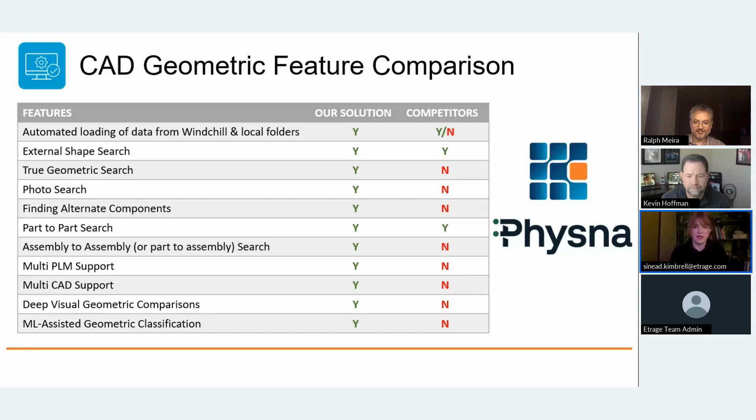One thing I do want to point out that I think differentiates us in the PTC space is that first line you see, automated loading of data from Windchill and local folders. As a PTC partner for over 20 years, ETRAGE is uniquely positioned to help companies who are currently using or planning to use Windchill. So ETRAGE Publisher automatically loads data from Windchill and local folders. If you had CAD data living outside of Windchill, we can take that and automatically publish it into Physna for you.

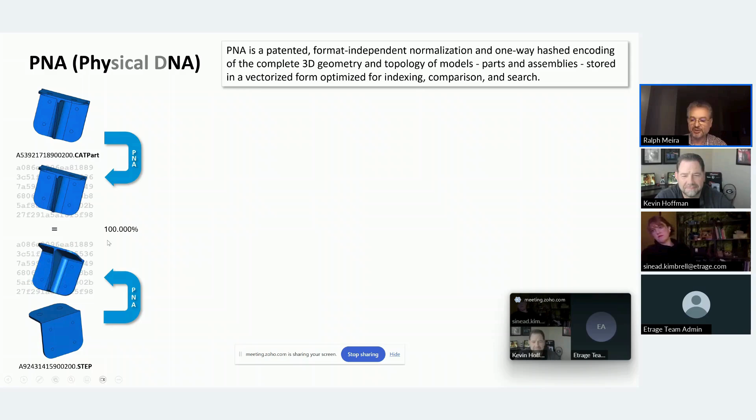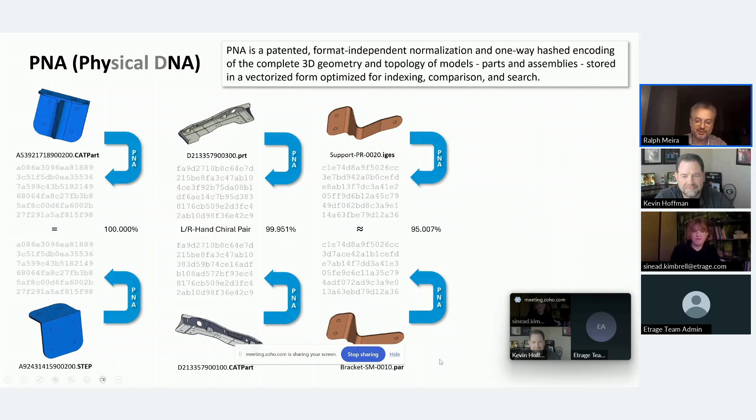And Physna is a deterministic algorithm. It's using geometry, not AI, so it doesn't hallucinate. It repeats every time the same answer. We do use AI to enhance our query capabilities, but the core algorithm is actually pure math.

So now here you have an example of an assembly where the physical DNA is a little bit longer because there's more geometry to describe. And here's an example of a subcomponent of that assembly, and it has its own physical DNA that is embedded in the physical DNA of the larger object.

I like to show these slides to begin with, because when I demonstrate what Physna can do, it looks a little bit like magic. And so it's really good to ground yourself, come back to, okay, it's just a bunch of strings of data that now I can search using precise searches, like in the case of finding this object in this assembly, or very similar strings that lead to very similar parts. We've literally codified the 3D world into a string of vectors that is a very powerful concept.

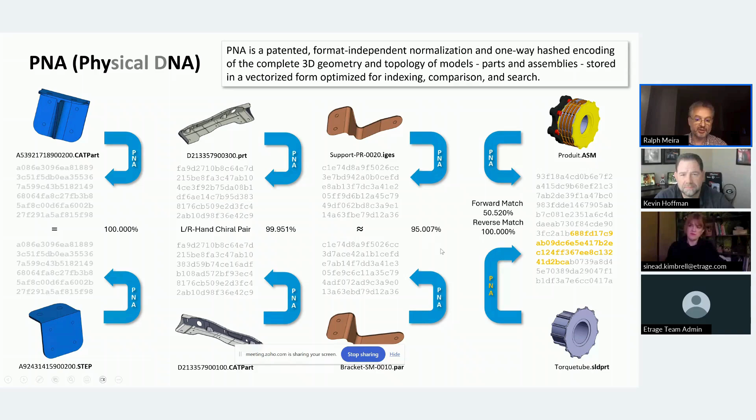And so the best way to understand it is to see it in action. So I'm actually going to switch over here to Physna and show you what it looks like through its web UI.

So Physna runs on cloud platforms. It's containerized so that it can be deployed easily in all sorts of environments. We do, for example, do business with the US Air Force, and so we've gone through the whole part of having DoD Impact Level 5's capacity that meets FedRAMP High standards. So from the security perspective, I think we're well covered.

But from the simple, how do I access? It's just a browser. You don't need a plugin. There are no special CAD licenses. And yet you're able to manipulate 3D data using folders and subfolders, and then be able to literally point and click and see 3D objects and manipulate them in any way you need. So as every other search engine should have, we are able to search in 3D.

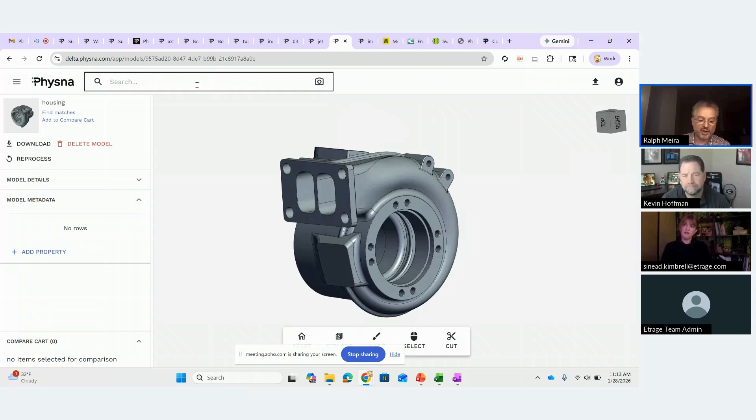So if you type something like a keyword that hits elements of metadata, you see here, I'm looking for seats, and I'm finding seats. This database—I'll talk a little later about where the data is coming from. What I just did there is called a 1D search. I typed a word and it found it in the metadata.

If I click over here on the little camera icon, if I'm using a mobile device, it's going to use its camera. In this case, I'm using a PC, so I'm going to load a folder full of pictures, and I'm going to use this retaining ring. So I just gave Physna an image of an object. I'm not too sure what it is. I can give it multiple images if you do have them.

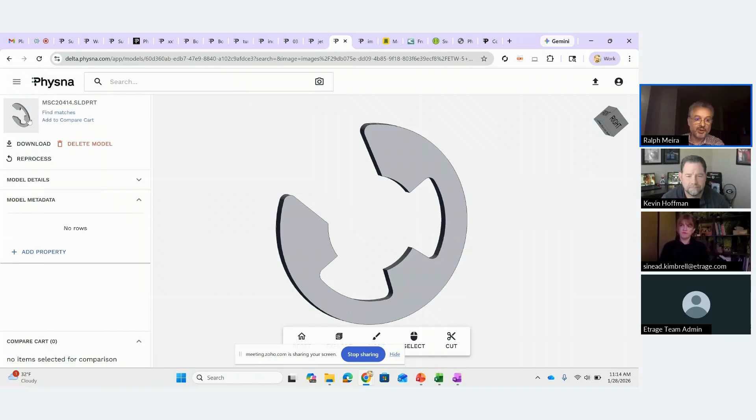But look how quickly Physna was able to look through its database and its 3D geometry and render all the objects it has until it found the one that matches exactly the picture. So now I know this is an MSC 20414. And if I use that to search, Physna comes back and tells me it's 100% sure that this assembly and this retaining ring go together.

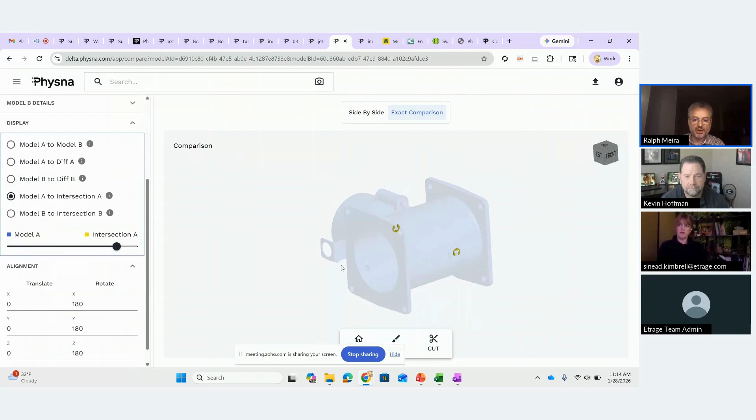So I'm going to ask it to compare, and I want an exact comparison of where they intersect. Let's change the opacity of the larger object. And there, in a matter of seconds, I went from picking up something on the ground, figuring out what it is through a picture, and now I know where it came from. This is a live system, so you're seeing the performance of the system as it really exists.

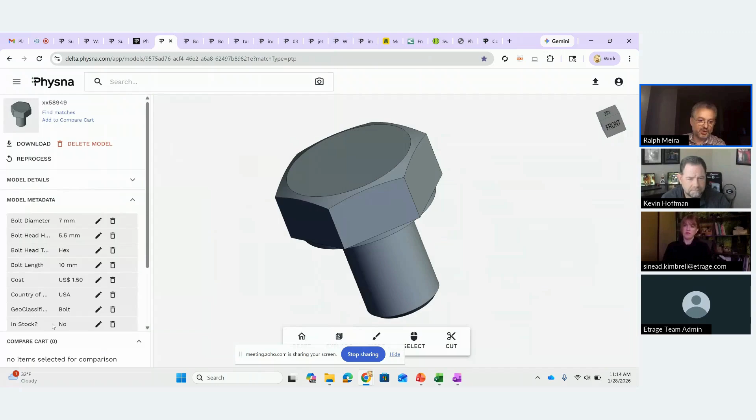So how can this be used? Take, for example, you're looking for a bolt. This is a classical case across all industries, and the bolt is not in stock. So all you have to do is search using Physna, and it will tell you, I found several possible matches. The top one is a 100% geometric match.

And now I apply all the metadata to make sure it is exactly what I need. So this one is made out of steel, it is in stock, and I seem to have it in—Grainger has it, at $2.50. So there, in a matter of seconds, I went from having a problem with obsolescence, an object I can't find in my inventory, to finding your supplier with a 100% match.

Now this example here, a 96% match. This is where it really gets interesting. You would never think of comparing the XX58949 bolt to the bolt named in French. And yet Physna does do it, because mathematically, geometrically, they're very similar.

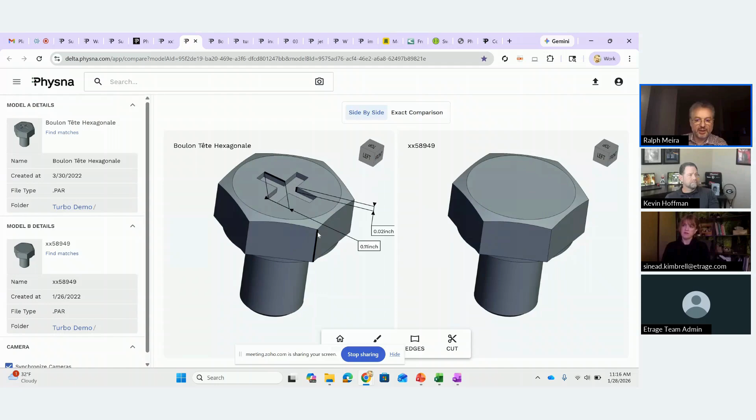And I can put them side by side and let Physna show me through its tools what's the depth over here. Let's see—over here I can measure this Phillips kind of symbol. This gives me a good idea that they seem to be very much the same. I mean, the 96% already speaks lots.

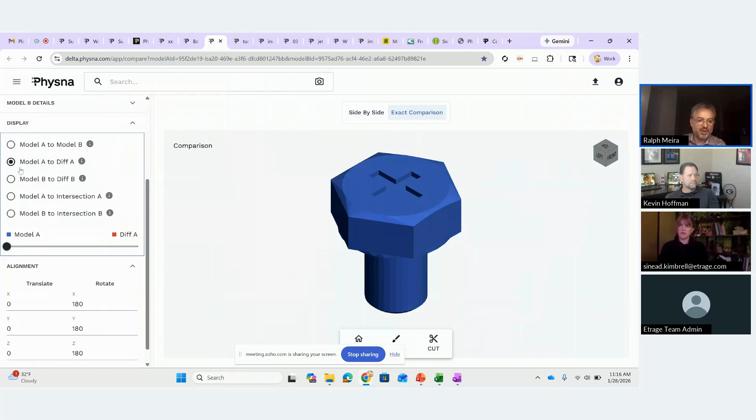But look how more interestingly, I can ask Physna, show me exactly where these two bolts are different. And Physna highlights—it's really just at the top. So going back to the search, this object is a potential substitute for this one if that little plus symbol on the top is not relevant functionally. And that's the power of Physna: the ability to find not just identical but similar parts and candidates for simplification.

Let's say I have both of these in inventory. Perhaps I don't need to keep both of them. And the savings can be quite substantial.

Now, when I queried using that bolt, Physna also went ahead and searched for locations where the bolt fits. So it would be a part-within-a-part kind of search. And here we have the turbocharger, 100% guaranteed to host the bolt. So let's take a look at that.

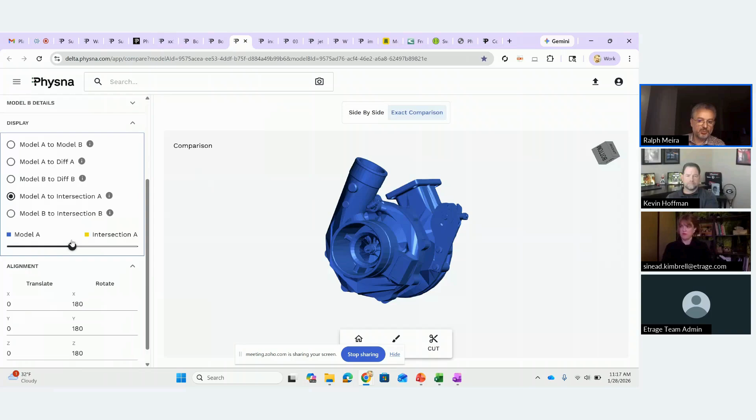Let's intersect the turbocharger with the bolt, and there we get a multi-match. So I need 8 bolts to service the turbocharger. The fact that I don't have the bolts means I've got an 8x problem. And it's as simple as point and click.

So you don't need to know a lot about CAD systems, you don't need to know a lot about geometry—the system is quite intuitive. And again, if you search using an assembly, not just a part, that's not an issue. Over here, I'm searching using the subcomponent of the turbocharger, and it says the next level higher up is the turbocharger itself. I'll show you the full workflow.

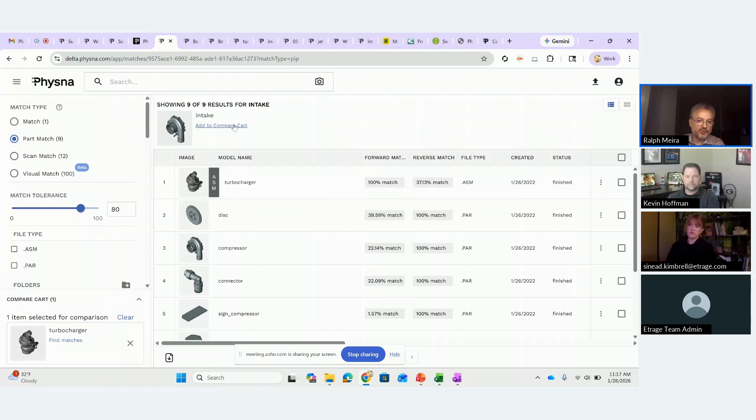If I put the two together and compare them, I want an exact comparison of where they intersect. I should see that intake valve and the turbocharger put together, and there it is. Again, if I want to see just the original part there, that really helps me see where it fits in the world.

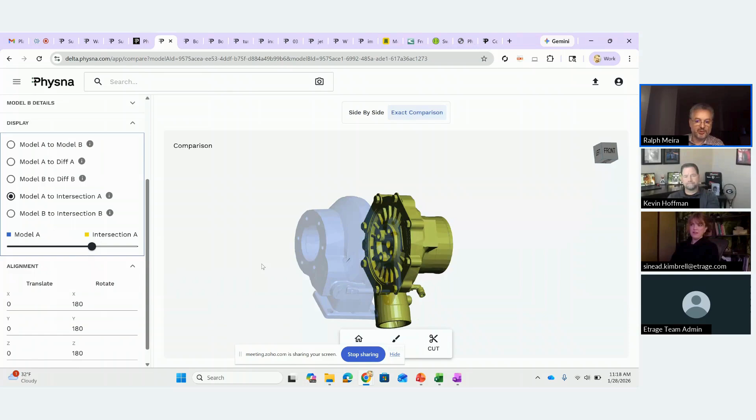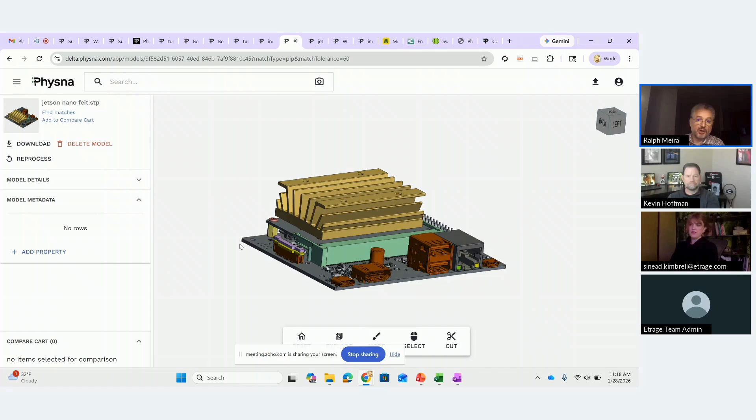If you're dealing with an electronic component like a capacitor, where all the properties are extremely important, you can use Physna because it will match that capacitor across all the circuits in its database. In this case, Physna matched that capacitor and found it here. Or I can just ask Physna, show me where - and it turns out there are 2 capacitors.

If I'm dealing with this whole circuit, navigating in a 3-dimensional way, I'm interested in seeing what else I have in my inventory that can be used to assemble this circuit. It's just a search, and Physna comes back and tells me all the other similar circuits, but also the subcomponents. Look how interesting - let's say I'm looking for this chip.

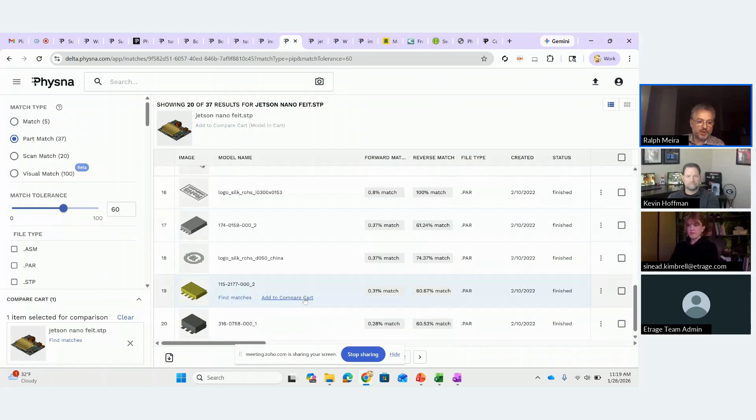I can add the circuit and the chip together, compare the two, and ask Physna to show me exactly where they intersect. You can see it's the same workflow. That little chip I would probably not see from the outside, but Physna sees the inside and the outside, so there's the chip - that's where it's positioned inside the circuit.

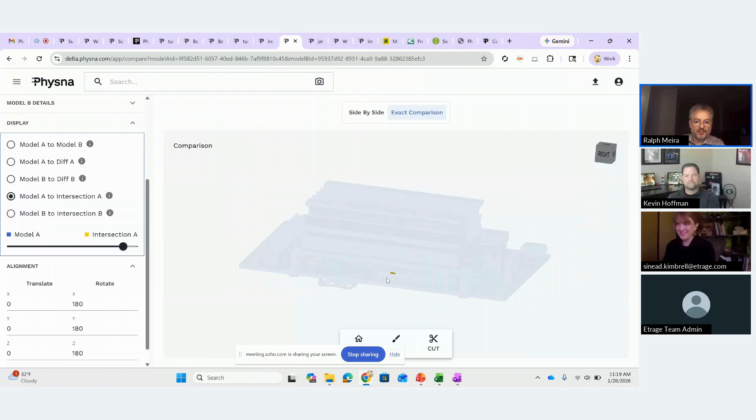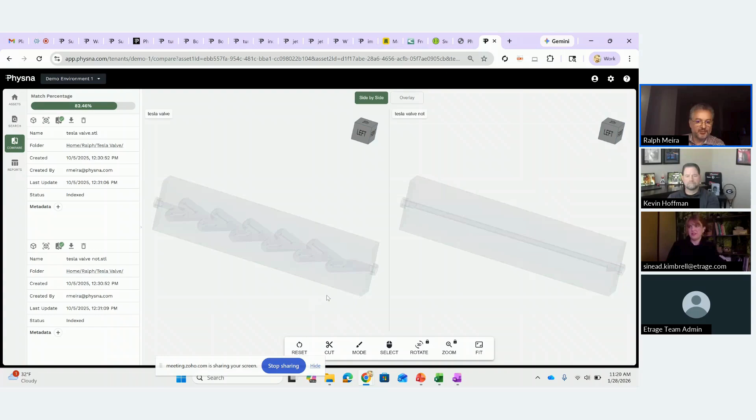I mentioned we operate on CAD files, multiple different formats. The formats extend from Dassault, from PTC, from Siemens, open standards - SolidWorks, Solid Edge, Autodesk, that's not a problem. We can literally see across all those formats because we use a standard physical DNA as the comparison tool.

So where does all this data come from? It comes from product lifecycle management solutions, and it also comes from the market. If you look at McMaster-Carr and take any one of their objects, you'll see it's available in several 3D formats, including product detail. And they make it really easy - I'm not even logged in, and I can access all this information because it speeds up sales.

That's why the vendors are making it possible and easy for you to access 3D data. We partner with these companies to access their data and make it available to you as well. Here's another example, TraceParts, with over 170 million objects from over 2,000 vendors in 3D. So when you're searching, you can search within your own library, or we can help you extend and search across different libraries.

Now, if you say, well, I deal with very old equipment and sometimes I don't have access to CAD - well, if you can scan the object, using a LiDAR scanner or photogrammetry, then I can use that as a search criteria as well. And Physna comes back here and shows me multiple matches and even CAD files that correspond to that scan.

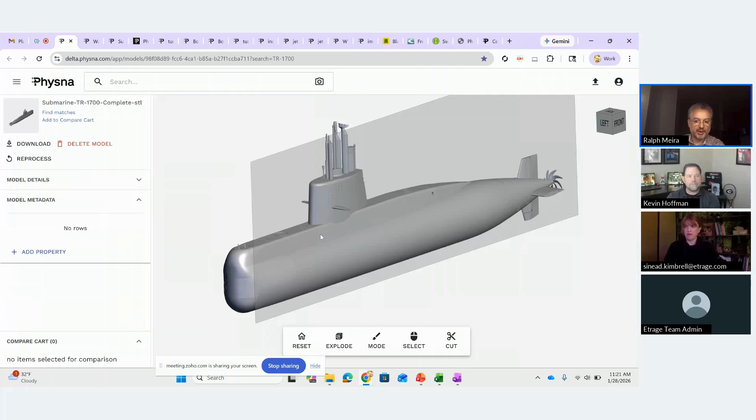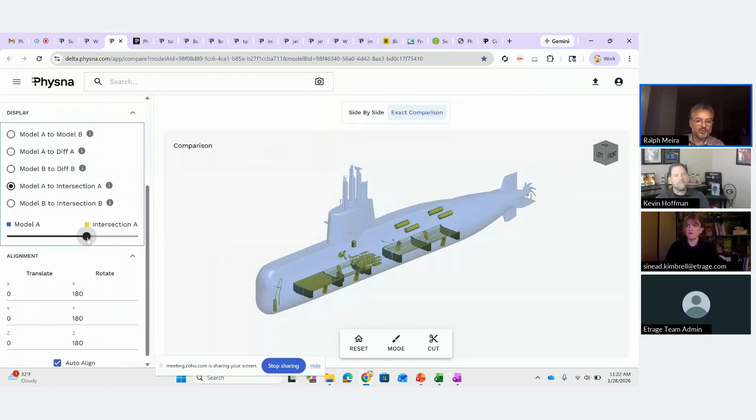So what I'm showing you at scale means the following. If you take a complex system like a submarine or an airplane, and a warehouse or a simulated digital twin of a warehouse of all the things you purchase or plan to purchase, you can ask: what are the things in the warehouse that can be used to service the submarine? The answer is just an intersection of the two. Geometry doesn't lie. So here you have all the elements in the warehouse and in the submarine, independent of labels - it can have as-manufactured, as-stocked, as-purchased numbers. That doesn't matter. We're just looking at the geometry to match exactly what you need to see.

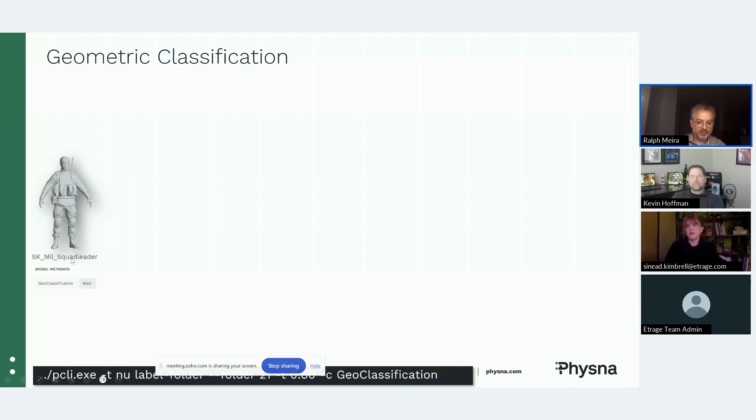Let me go back to slides and show you one more example of how Physna can be used. We did this with NVIDIA a few months ago. They have this environment called the Omniverse, where they do a lot of 3D simulation. They have these objects - I picked one of them, labeled it as a man, and gave Physna a command line interface command saying that if you find anything within an 80% threshold, go ahead and label it the same way. So this is what it did, and then recursively, this is what it produced. As you can see, using geometry, I can organize and classify my inventory very quickly and efficiently.

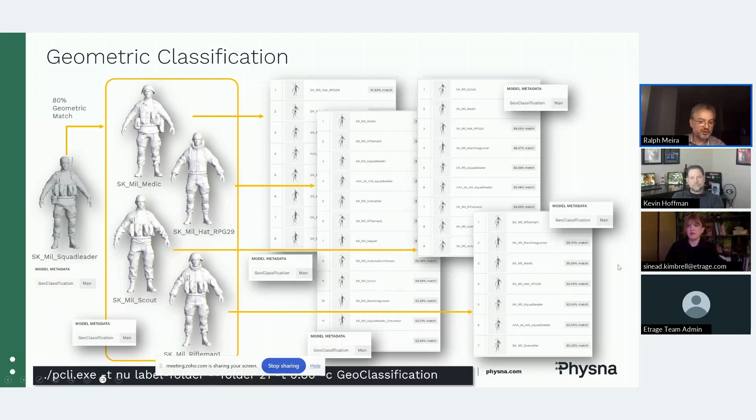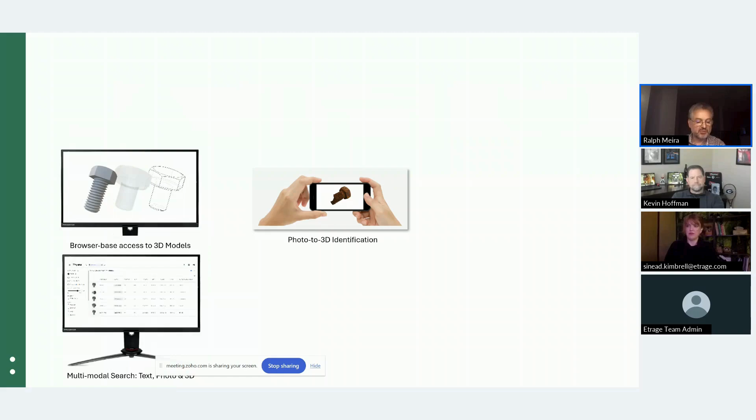So let's take a step back. I showed you that I can search using text, when I typed in the word seat, or image, when I had the retaining ring. When I perform these searches, I find 3D objects and data about those 3D objects, like where it fits in the world. That's one type of search. I can use that to classify, organize, and assess my inventory levels.

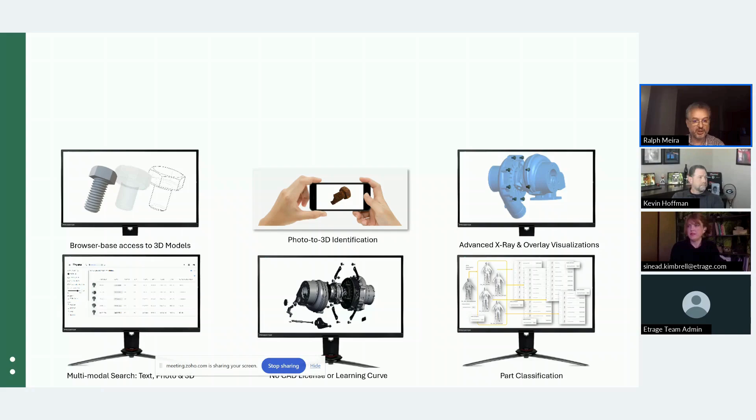I've got advanced visualization, and yet the learning curve is not steep. CAD systems are notoriously hard to use, as hopefully you've seen through this demonstration. Physna is not. I can see across different file formats, so that enables mergers and acquisitions analysis—do they purchase the same things I purchase? I can perform analysis at scale, as I've tried to show you with the submarine and the warehouse example.

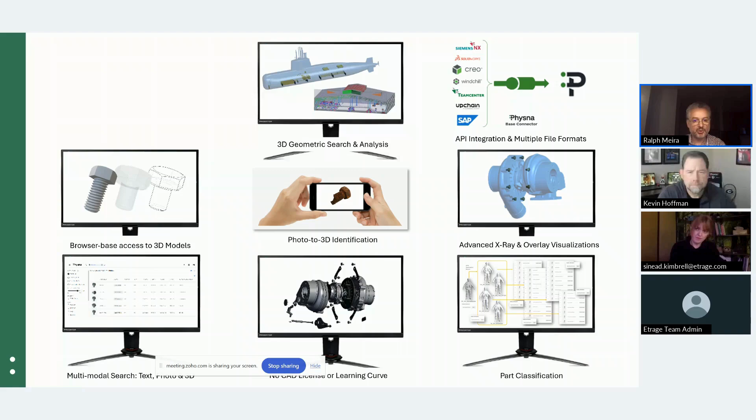And even if you don't have CAD, if you're dealing with old equipment, but you can scan it, that's a really good way to start. So these are kind of the technology features.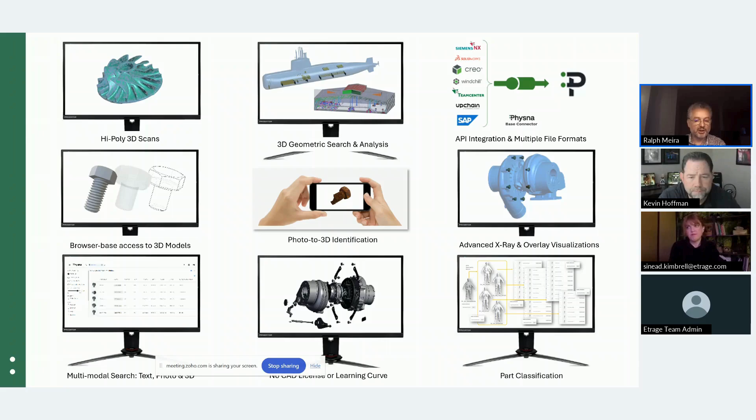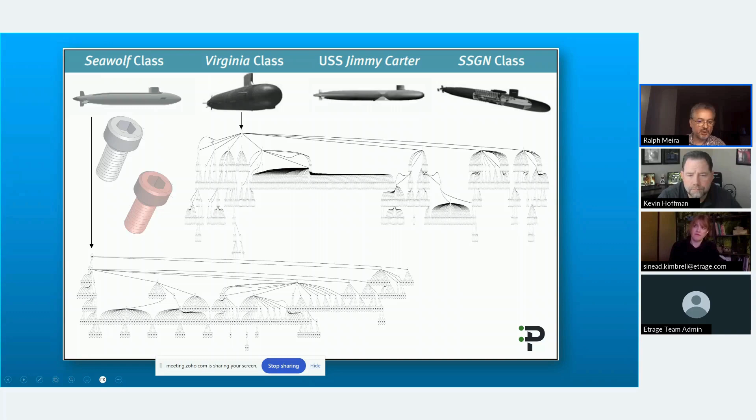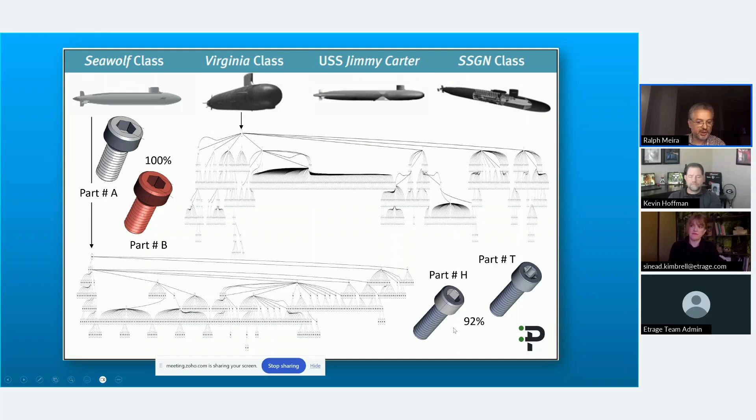Now let's take a look at how we apply this in the industry. I'll take an example of, before Physna, something that the Air Force, or actually the Navy in this case, performed in the early 2000s. They looked at the Virginia class and the Seawolf class submarines' bill of materials, and went through each and every item. Whenever they found two parts that were the same but had different names, they standardized. Whenever they found two parts that were very similar, candidates for standardization or simplification, they went ahead as well. In doing so, they spent $27 million.

544,000 man-hours, but the effect of eliminating duplicates and standardizing was $1 billion with a B. So this whole effort took over 4 years to accomplish.

This effort now—we're about to start a very similar effort with the Navy. It's going to be done in weeks, because Physna is going to do all the comparisons, finding all the matches, all the candidates for simplification, as opposed to having human beings combing through extensive sets of bill of materials. That's the power that we're putting in the hands of commercial businesses and the military, the DoD or Department of War nowadays.

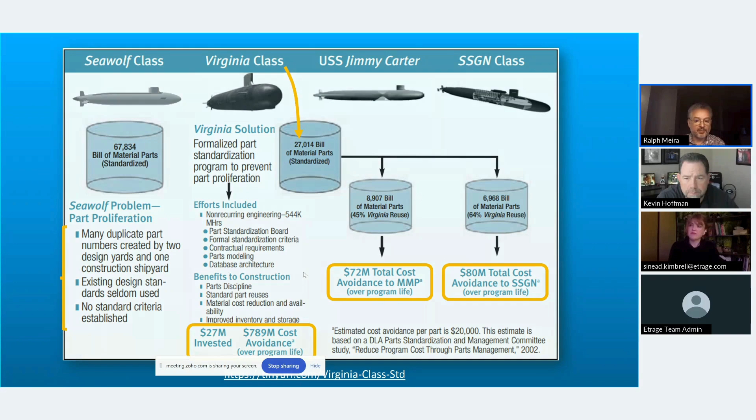And it all starts off with the ability to pull data from different warehouses or different weapon systems or anything that has a 3D element to it, which really kind of spells out why the partnership with ETRAGE is so important, because data is king.

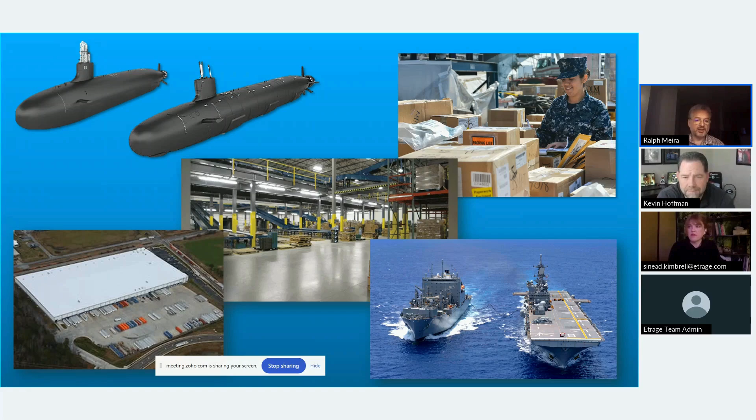I'll leave you with this slide here of some ideas of what we can do with Physna: optimize inventory, enhance maintenance efficiency by connecting geometry of an object that breaks very often all the way back to design, and preventing the introduction of duplicates or problematic parts into the supply chain. If you're dealing with 3D, you should think Physna, because we definitely have something here that I think is worth looking at. So that concludes my presentation.